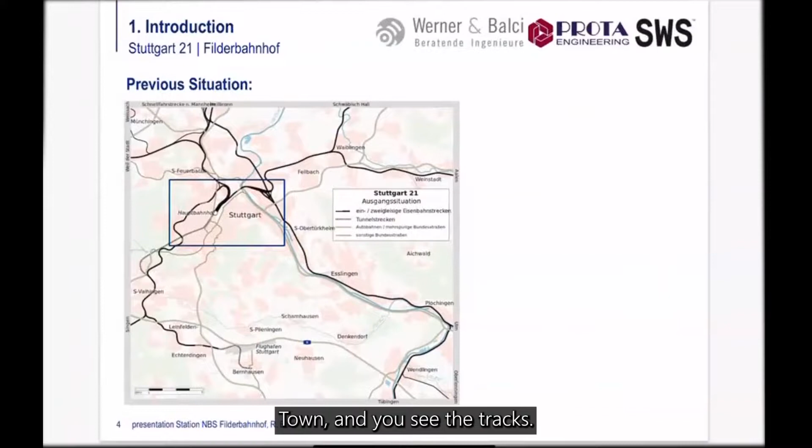This is the track going east. With this track you can go to, maybe, Ukraine, the war zone. Now we have a war in Europe. Here we have a track going to the northeast, let me say Berlin. Here is a track or line going to the north, I will write down London. On this left side you can go to the west, I will write Paris. And down south you can go to Switzerland, I will write Zurich, or Italy, so I will write Italy.

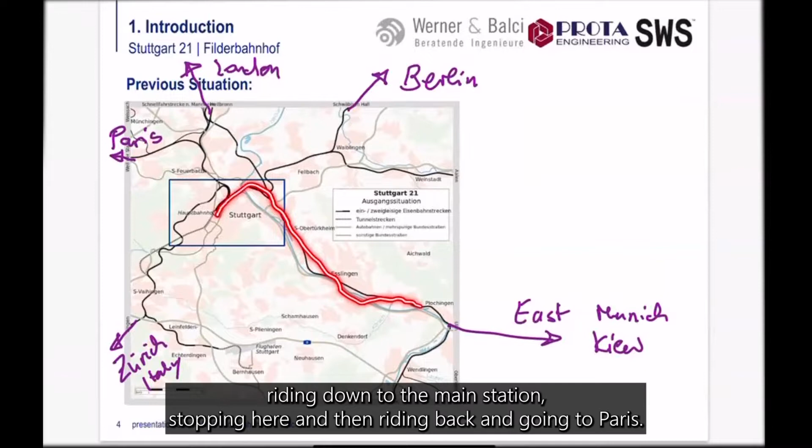So as you see, Stuttgart is, for railway issues, a hub, a center. And the problem is the Stuttgart main station is very old and very weak. Every train coming from, for example, this line, rides down to the main station, stops here, and then rides back and goes to Paris.

So this is the next thing I want to show. Every train comes through this line to the platforms, stays here, waits, and then goes back to the other place. This is a so-called dead-end rail hub. We have 16 platforms. The problem is that we have only five tracks at this point, so some trains are waiting here so that the tracks are free to leave the Stuttgart area. This is a big issue, and you can't widen it because there's no land to make extra tracks.

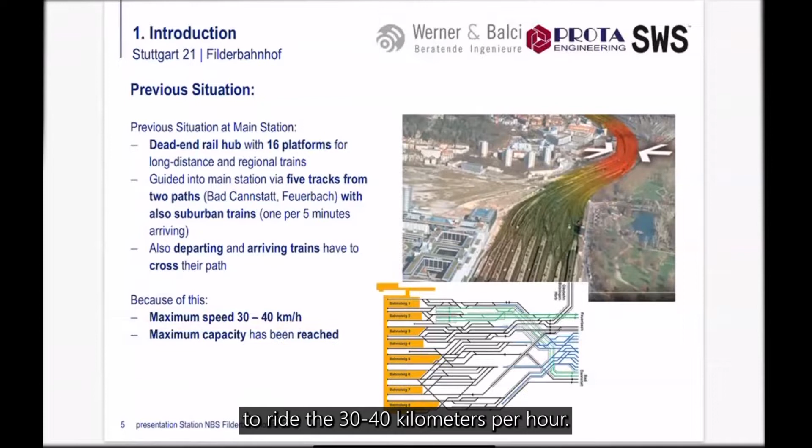Another thing is we have housing and buildings around the train station everywhere along the tracks. Because of sound problems, trains are only allowed to ride at 30 or 40 kilometers per hour, so it's also a speed issue. The capacity is reached, so there are trains waiting, and we have a lot of delays and problems. You also see a lot of crossings here, and these are special railway points which need to be repaired in a certain time. This is also a big problem of Stuttgart.

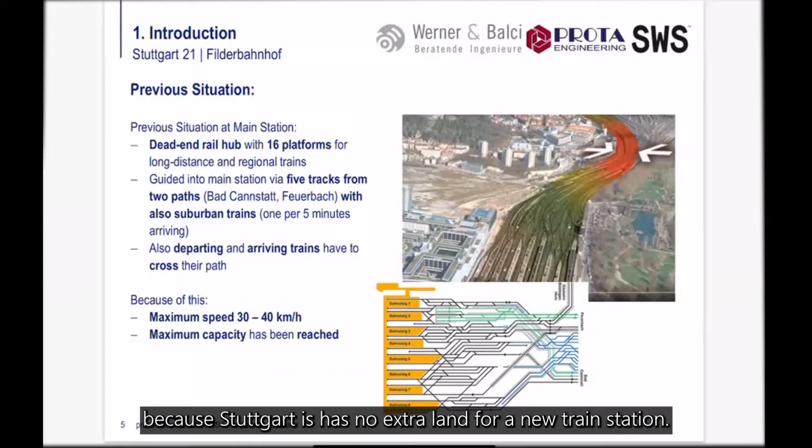As I showed, we are in the center of Europe, but we have the weakest train stations, so it was decided to change it, to build a new train station and new tracks to make it more efficient. It's a problem because Stuttgart has no extra land for a new train station, so the only thing to do is put this train station into the ground. This will be the new solution: trains coming from here will go to the main station and pass without riding back through the train station. We will later focus on this train station.

This is the new airport train station where our office is mainly designing. You also see numbers here: 1.1, 1.6, 1.3, 1.4, and so on. Our company is working on 1.1, 1.6, and 1.3. Today I will talk a lot about 1.3.

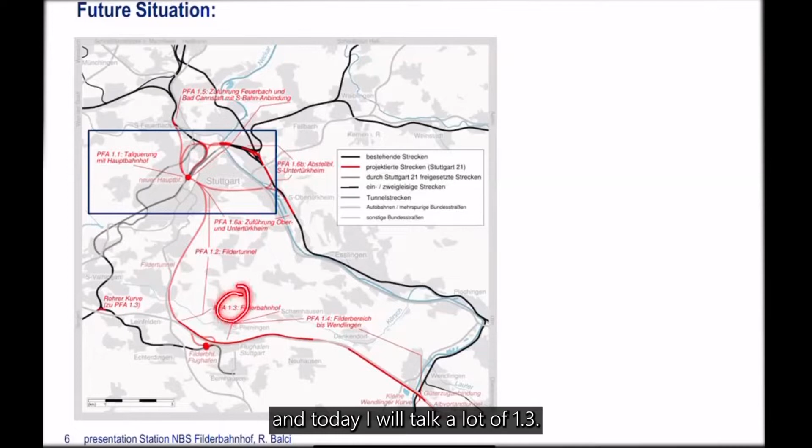Black are the existing tracks. Gray tracks will be removed, so we will not have these gray tracks anymore. So what does it mean? It means we need to build 120 kilometers of new tracks, 4 new stations, 33 kilometers of tunnels, and 18 bridges. The biggest gain is we will have free land because the tracks will move down under the ground, so we will have 100 hectares of land for city development. This is 1 million square meters of land downtown in Stuttgart, in the heart of Stuttgart.

The next improvement is we can ride with 250 kilometer speed, so it's also very efficient. We will increase the capacity, and the solution is that approximately 18 million trips will move from car to railway. So people will ride more by train than by car, and it's also good for the environment.

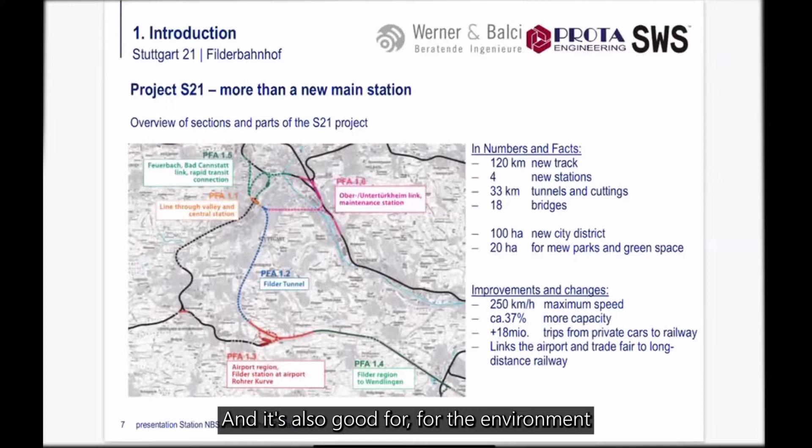Here again, this is the airport station. This is the main station. We will talk about the main station a little bit and then later focus on the airport station.

So just to understand what is going on in Stuttgart, this is only an overview, not in detail. I showed you the numbers: we have 1.4, 1.3, 1.2, and so on. Our company is working on 1.6. On 1.1, this is the train station here in Stuttgart. 1.3 is the airport, this is the airport station. This is the main station, and these two projects will be my part here in this seminar.

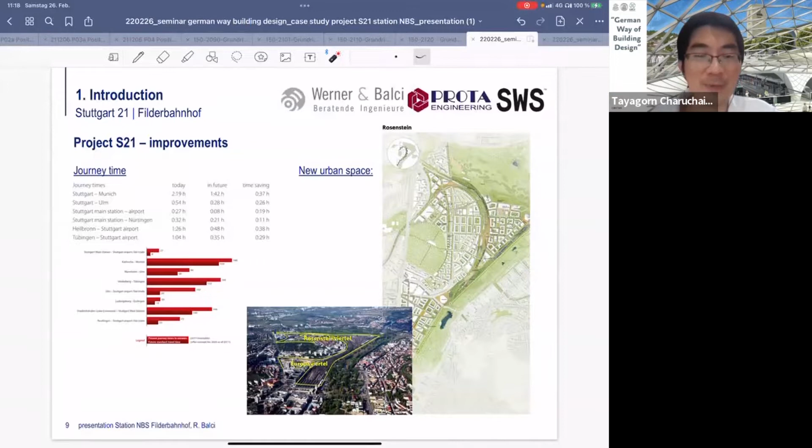Okay, so I talked about extra land. This is a photo. Here are the existing platforms of the existing train station. So after we put all these tracks under the ground, we will have 1 million square meters of land in Stuttgart downtown for free, and this is very, very good for the city development.

So here you can see what will happen in maybe 20 years if this land is developed. We will have green areas, office buildings, apartments, and so on. It's a big gain for the city of Stuttgart.

Another thing is, I told you about speed and efficiency. For example, if you want to ride from Stuttgart to Ulm, you need 54 minutes today, but this is only if you have no delay. I told you we have delays because the tracks are busy and some points are not working, so this is the minimum time today. In the future, we will have only 28 minutes with the new train station.

So it's very efficient. For example, from Tübingen to Stuttgart Airport, you need 1 hour 4 minutes today; later you will ride in 35 minutes. So it's also a big gain for people riding by train. For example, Stuttgart to Munich, now you need 2 hours 20 minutes, and later it will only be 1 hour 40 minutes. So the train station will be more efficient.

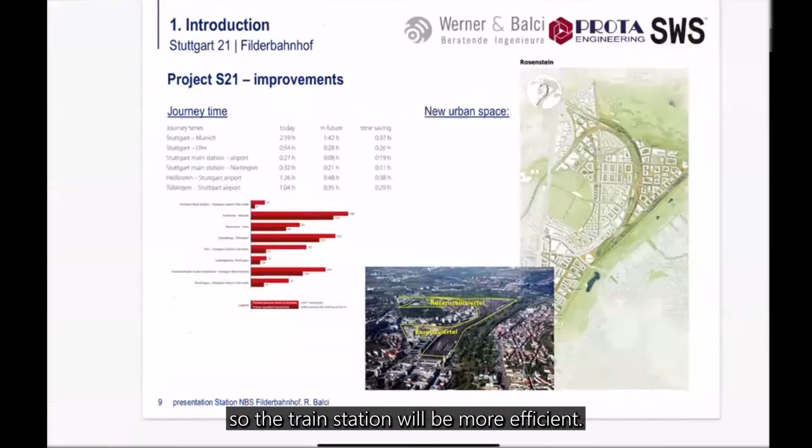I'm riding by train many times. I use the existing train station, and I need to arrive 20 minutes earlier because some trains start earlier and some trains have delays, so I have time to adjust. I also calculate half an hour of tolerance for arrival, because I know Stuttgart main station is a big problem.

Stuttgart main station is a big problem. Other train stations in Germany do not have that kind of problems.

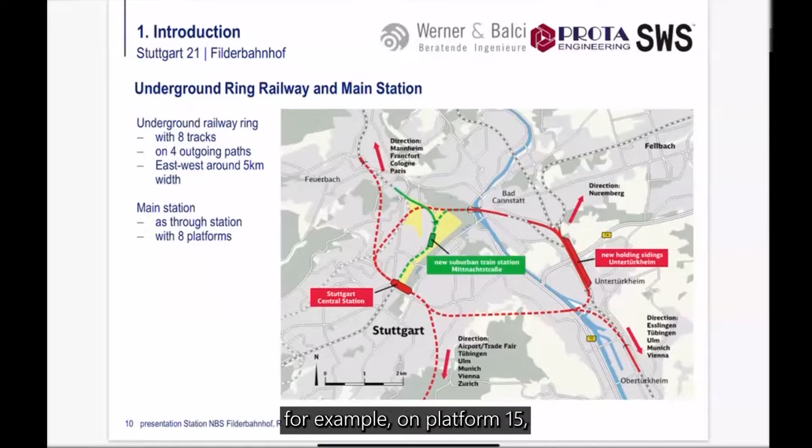The new train station will only have 8 platforms. The old train station has 16 platforms. So it's more efficient because you don't have this waiting time of the trains. If I arrive in Stuttgart on platform 15, I need to run with my luggage to platform 1. Later on, with only 8 platforms, it's also easier for people to go from one platform to the next.

So here in this photo you see the old tracks, the old station. Later, the new station will be underground, and crossed by 90 degrees, totally changing the track direction. This land will later become a new district of Stuttgart.

Here's a visualization. This is the old train station building, built 100 years ago. It's a historic building, so it's not allowed to be demolished. But later on, this is what we will see of the train station.

The entire train station will be underground, and you can walk by feet directly over without any stairs. So for a handicapped person, it's a direct connection without any stairs.

Platform length 420 meters, 8 platforms, as I told. These photos are not the latest photos, but you can see the concrete work is already finished.

These 'light eyes,' as we see here and here, will have a very positive effect. You will have a lot of daylight in the train station. You will not feel like you're in a tunnel. It's like a roof. They are here, these spots - these are the light eyes.

Our company designed these cup-shaped columns. We were in charge of the formwork for this shape. Here you see a sample of how they cast it. It's concrete - not plastic, plaster, or metal sheet. It's cast in concrete, and it's also white concrete.

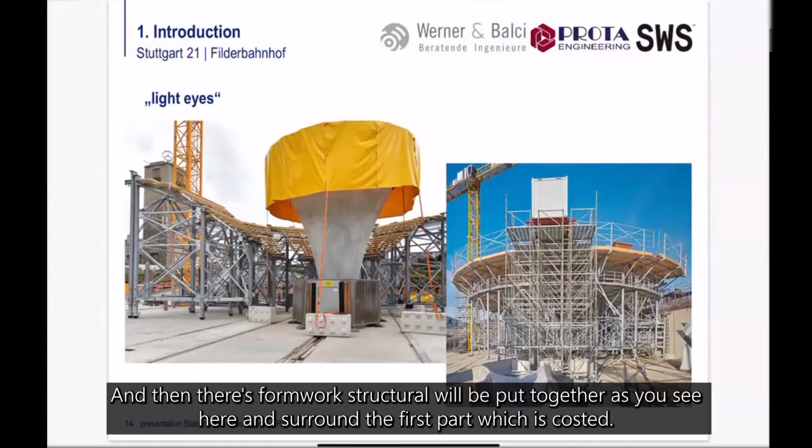This is the first part cast, and then this formwork structure will be put together, as you see here, and surround the first part which is cast. Later on, this is a top view after the reinforcement work. Here's the light eye, where there will be a glass covering. Then after casting, one column is finished.

To understand the height, you see here a car - this is a car. So it's really a very high column. We are talking about 1,500 tons of concrete. Our company did the design of this shape.

It will be very beautiful, and in my point of view, it's a very big gain for the city and for people traveling to Stuttgart, because if you ride by train in Europe you will see almost standard train stations, and it's really boring. But if you arrive in Stuttgart, you will see something special. It's totally new.

Okay, now we will switch over to the airport train station. Pop, do you want to translate this light eye cup-shaped columns part, or shall I go on?

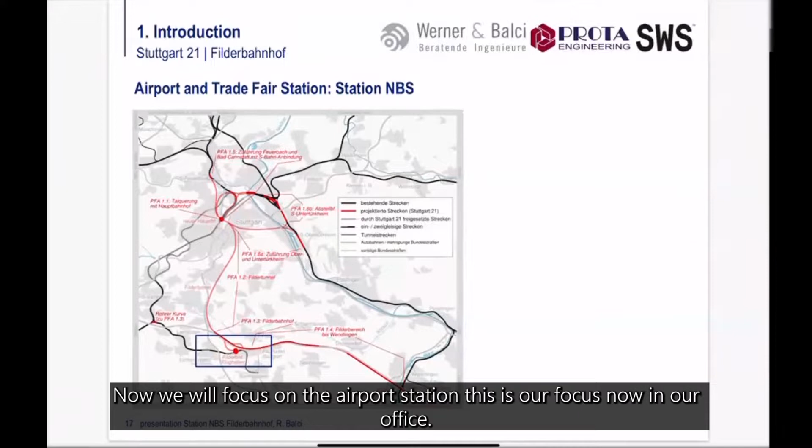This was the train station. Now we will focus on the airport station - this is our current focus in our office, we are working on the airport station. The airport station, from an architectural view, is a very simple station. It's not that nice, we don't have the nice columns like in the main station, but it's the deepest train station in Germany.

Just to understand the location, I will zoom in a little bit. This is the main motorway number 8, the main motorway from east to west, passing through Stuttgart. Here's the airport of Stuttgart. We have the metro line called S-Bahn going this way.

We will have the Gäubahn, the blue line train coming from Switzerland and Italy. We will have the tunnel coming from Stuttgart center. So here we will have a hub for motorway, for cars, for aircraft, for metro, for high-speed trains - it's a hub of traffic. These buildings here you can see are the new exhibition center of Stuttgart.

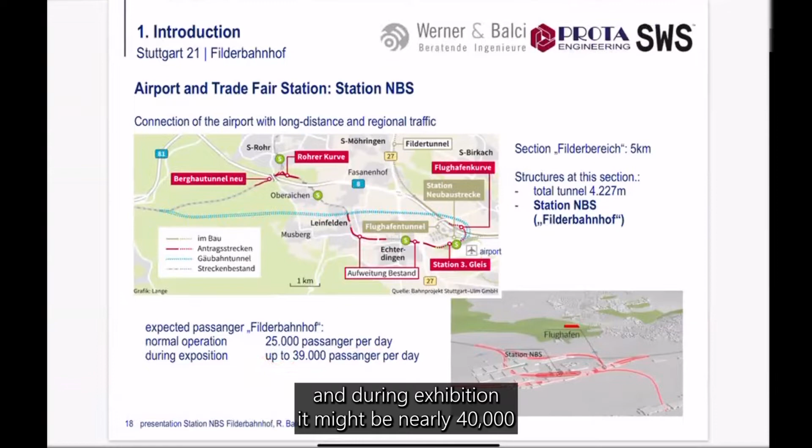We will have 25,000 passengers per day, and during exhibition it might be nearly 40,000. Here you see the new train station, and the tunnels are crossing the exhibition center. The tunnels go directly under the existing airport buildings. We are crossing the motorway here, here, here, and here. So this was the reason why the tunnels are so deep in the soil.

But it has to be also very close to the surface, because the people need to use this train station. Therefore, it was set at a depth of approximately 30 to 40 meters. But it's the deepest train station in Germany now.

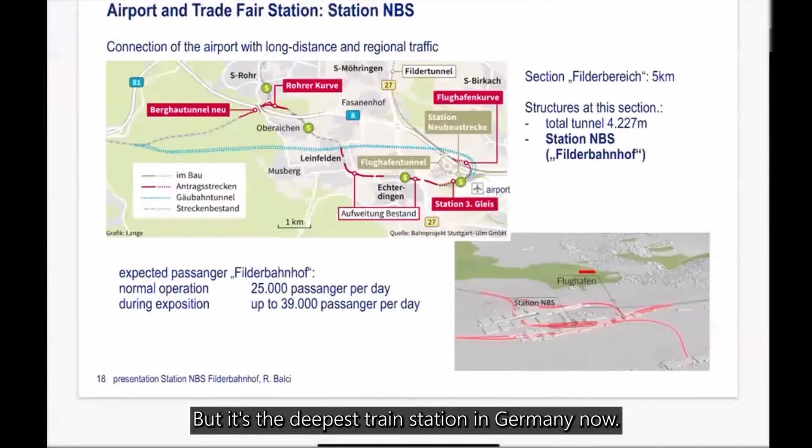Here you can see a view from top to understand the train station and the tunnels. This is the train station, from here to here. You see the tunnels under the exhibition halls, you see the tunnels under the airport buildings, and you see the crossing of motorways, a lot of crossing of motorways. So it's a complex project, but it's a very important project for all the people.

For example, if you want to go to the... one moment.

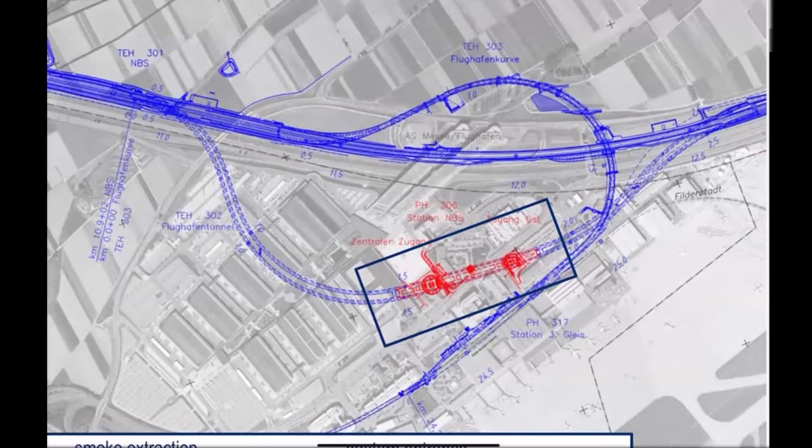If you want to go to the exhibition hall, you come by car and you can park here in this parking building and go to the exhibition hall. You can also park here and take the train to go down to downtown Stuttgart. Because it's hard to find a parking lot in Stuttgart, you can park here and ride downtown. Or if you arrive by plane, you take the train station and then you can ride to where you want to go. The train station...

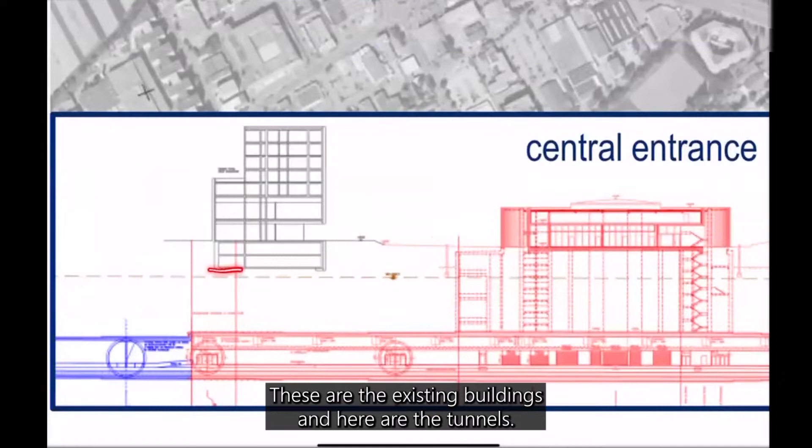Here is a good photo, a view. These are the existing buildings and here are the tunnels, so we have a little bit of soil between. It was the reason moving it upward would be risky for the existing buildings. Moving it downwards would be better for the existing buildings, but then all the people would need to go down further to the train station platform. So this is the optimum height under the soil, under the surface.

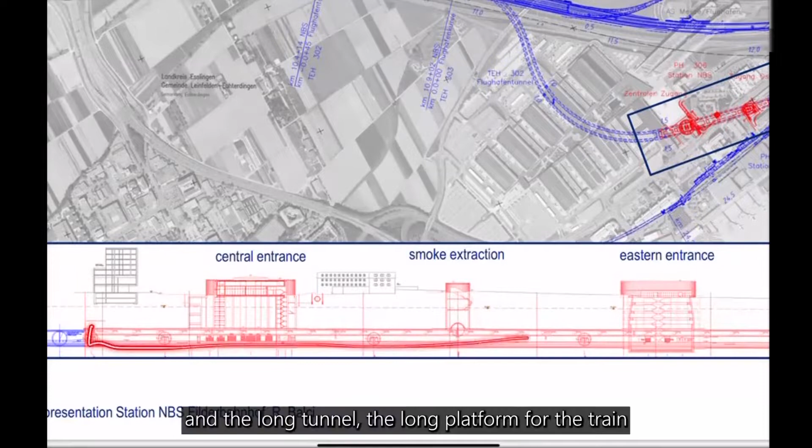So the train station consists of the central entrance, the big entrance, a smoke extraction building, and the eastern entrance. We have 3 buildings going to the surface, and we have the long tunnel, the long platform for the trains.

Because it's very deep, the most important thing of this station is smoke extraction. In case of a burning train, the people waiting on the platform need to find a way to go out of the train station, for example that way. And smoke is a big issue because it's very deep.

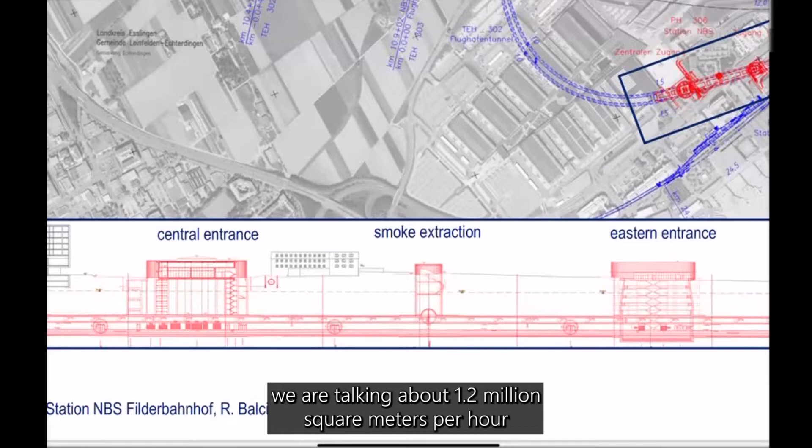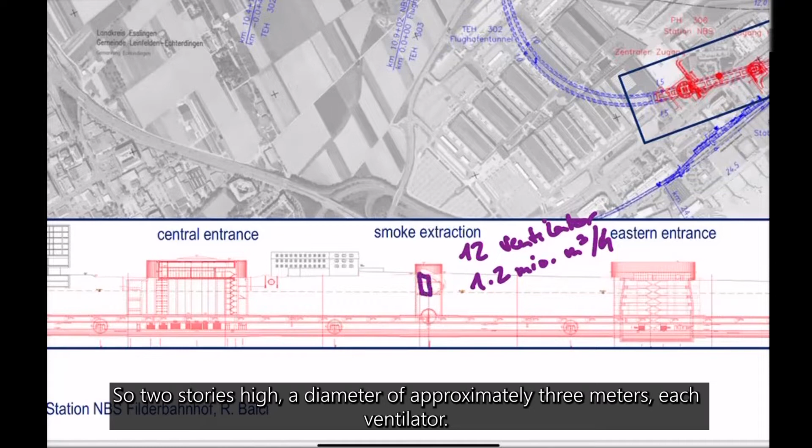We need ventilators, big ventilators. We are talking about 1.2 million cubic meters per hour extraction power, with big ventilators here, here, here, and also here. In total we have 12 ventilators for 1.2 million cubic meters per hour air extraction. These ventilators are that big, 2 stories high, with a diameter of approximately 3 meters each. Therefore we also need a lot of electric power. There are 3 transformers installed here only for these ventilators.

So in case of fire, let me draw it here. In case of fire and in case of smoke, the smoke will be extracted out of the platform, for example that way. And the people here can breathe and walk to the elevators and staircases.

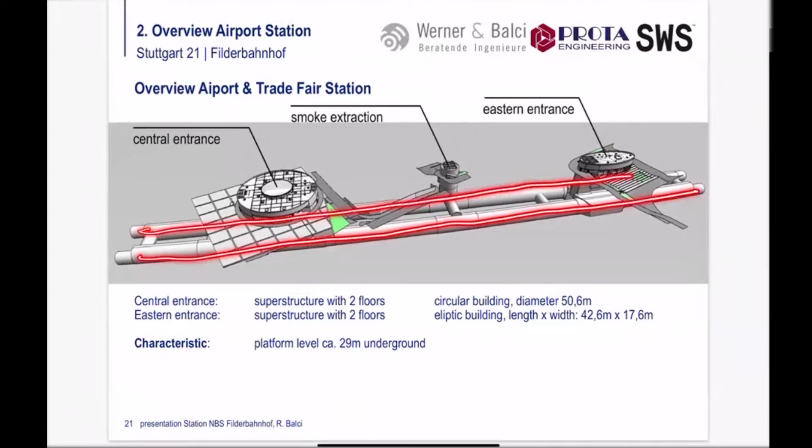Okay, this will be the new central entrance of the airport train station. So as I told, we have these platforms, the tunnels, and we have 3 buildings: central entrance, smoke building, and eastern entrance.

We are 29 meters under the soil from here, measured down to the platform. Here we are a little bit higher, close to 30 meters.

So the structure of the central building is mainly a concrete structure. We have micropiles, footings, a post-tension slab, and a steel structure here in the middle. Very important and something special is this membrane. There's a membrane roof, and this membrane roof is a cushion. It's like a balloon, you blow it up with air pressure, and it's stable because of the air pressure. We will talk later about this.

Okay, so this green building, as you see, is a concrete building, and it will be built later after the underground work is finished.

This is the steel structure. It's a wide span steel structure without columns.

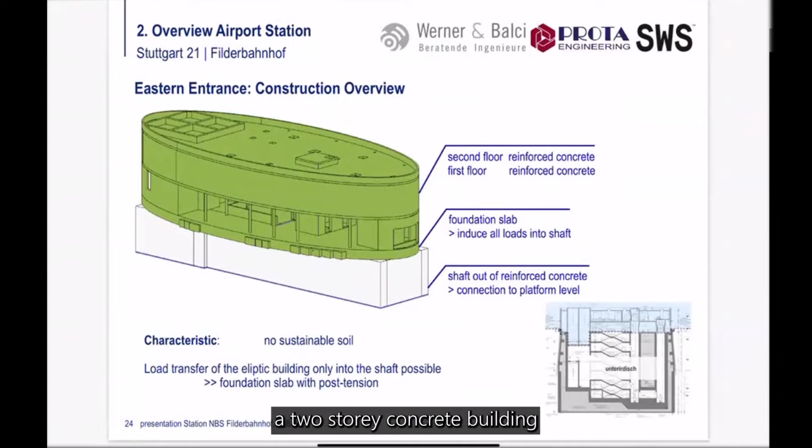Here we have the eastern entrance building, and it's an elliptical building, a two-story concrete building, and it was not allowed to build foundation here, for example. Therefore, we used post-tension slab.

Just to draw, to show you, we have the shafts going to the ground, and we have the elliptical building here. And the forces coming from left and right, we need to bring them to the center, and therefore we have a very strong, we are talking about 1 meter post-tension slab.

And these are the post-tensioning areas. You see this zigzag concrete shape there.

The situation on site is that the underground works are going on. We are not finished almost, but it will take, let me say, 6 months, and then we can start with the buildings. So here we have the underground work is going. The platform will be, the tunnel is walking that way, it's passing that way.

And you see the huge crane here. This is a huge crane to bring the machines up and down. This is a photo from the 24th of January.

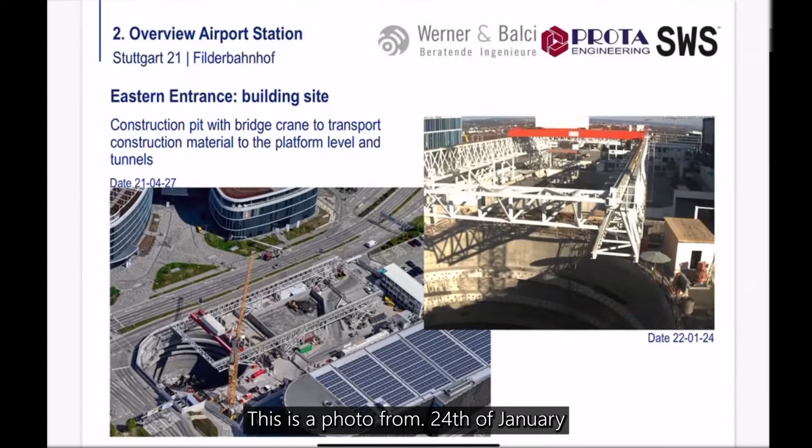So let's talk about the roof structure of the entrance building. As I said, we have a membrane roof. Do you have membrane roofs in Thailand? Yeah, just a small one, a cushion which is blown up with pressure air. Not just a temporary structure, the permanent one.

Okay, so we have a span of 20 meters, and this is the cushion. This is the shape. And there's a big pump here, and we are pumping air into this cushion.

So there will be always air pressure between these membranes, and it's a structural system. So the biggest problem of this roof is if we have a problem with the pumps, if we have a leakage, and we have a loss of pressure and a lot of snow.

I know you don't have any snow in Thailand, but if we have a lot of snow load here or water, the system will collapse and hang. And if we have later on or at the same time a lot of rain, then we will have a water sack.

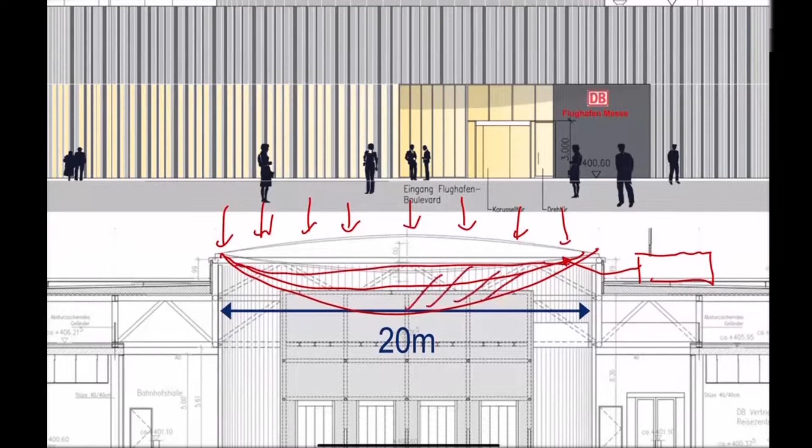And we calculated this load case, and we had 250 tons of water in this membrane. And you have to imagine, one moment, I will show you.

So you have to imagine you are the guy coming from Bangkok and waiting here. And here you have 250 tons of water hanging on the membrane. And if this will collapse and fall down, 250 tons of water from a height of approximately 40 meters, I don't want to imagine what this water will do with you down at the platform.

So therefore, we were asked to change this system. For architectural reasons, it would be very nice to have only one membrane, but for safety reasons, it was not allowed to build it that way. Therefore, we searched for a solution how to support the membrane.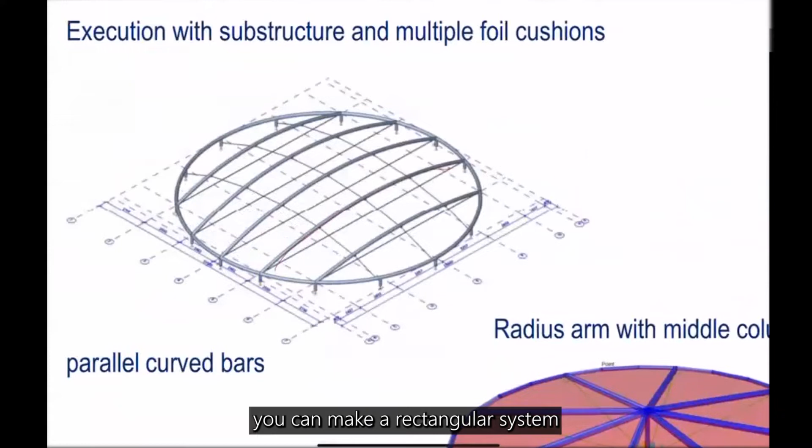There are different systems. You can make a rectangular system like that, or to support the membrane you can use radial arms, or you use something like a tensegrity system. We calculated everything and also the cost efficiency, and at the end, the client, German Railway, decided to do the tensegrity system.

And there's a sample just for your understanding how it would look like. This is the system, but we will not have so many bars like here, we will have less. And we will have also a membrane here in the middle, so it will be very transparent. The aim is to have as much daylight as possible on the platform.

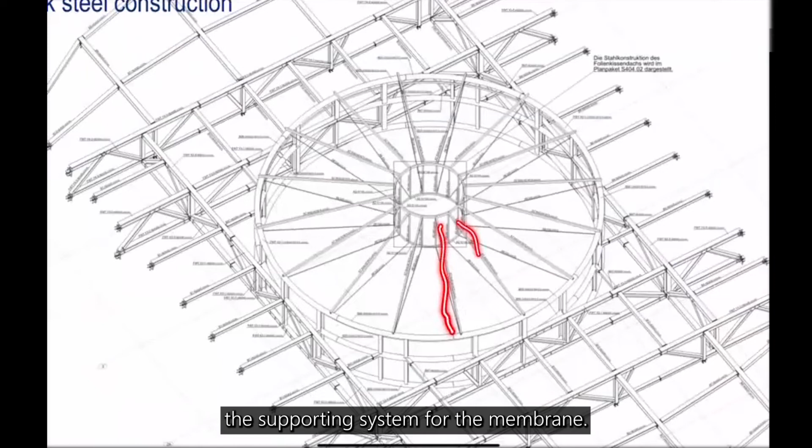Okay, the steel structure, and now you can see the supporting system for the membrane. So the membrane, even if there is a loss of pressure, it will not collapse and have a water sack.

Let's talk about the foundation. It was also not that easy because we have a tunnel 30 meters deep. We have a tunnel project, and if we build with big piles, we would damage the tunnels. So we were only allowed to use so-called micro piles.

Do you have micro piles in Thailand? Do you know this system? Yeah, micro pile. Okay, it's a steel pile, a very small steel pile, and the capacity is not that big. Therefore, we had thousands of these piles here. You can see everywhere the small piles.

This was the solution to bring the load into the soil. We have the post-tensioning slab. In this area it's post-tensioned, and in this area we have no tendons - it's standard reinforced concrete.

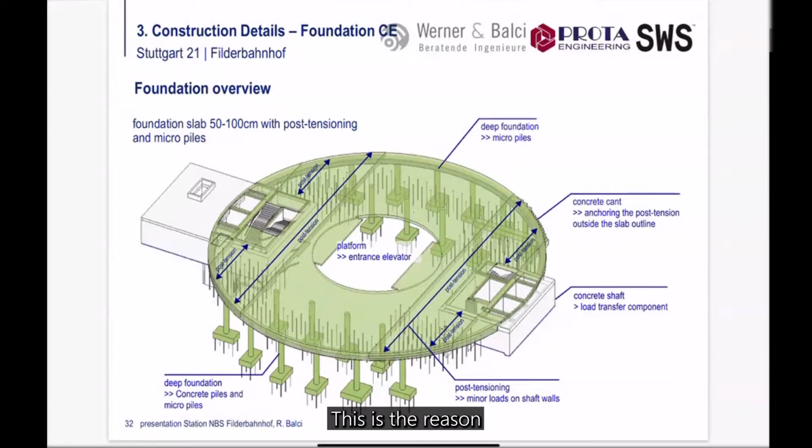Okay, these are the micropiles. So if you know what this is, we are talking about a bar of 40 millimeters, and this is something like that.

And we also had post-tension slab. I know you use this system also in buildings, but here we used very strong tendons. We are talking about tension force of 4,000 kilonewtons, or 400 tons of tension force. I think you should know how to install these tendons and how to make the tensioning and so on.

The Eastern building, we had a problem - there was no chance to build any foundation. So we have no foundation, and we are talking about a span of, let me say, 7 meters. We made this with a 1 meter thick base slab and post-tensioning in this area. So we have post-tensioning here, post-tensioning here, and reinforced concrete.

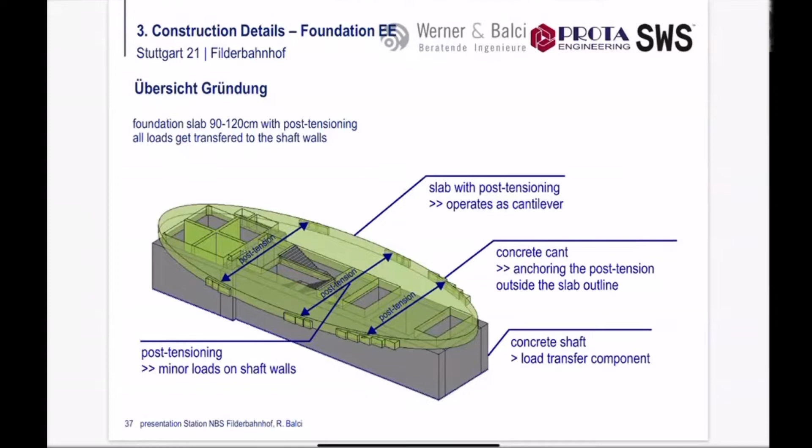And the shape of the tendons is that way. The force is not that high - we have 2,400 tensioning force.

And now the biggest problem of this project is the acoustics. As I told you, our office is an acoustic expert. We are listed in the top 10 of acoustics in Germany.

We tested the evacuation situation, where I told you about these ventilators - we have huge ventilators with 1.2 million cubic meter per hour capacity. The problem is that in case of fire, if we run these ventilators, it will be very, very loud. So if, for example, a burning train arrives at this train station, the fire alarm system will run, the ventilators will start, and it will be very loud.

The speech alarm system, for example, if you are a guest of this train station, is telling you please leave the train station, please use the next staircase to leave the train station. But the speech alarm system is not possible to be understandable.

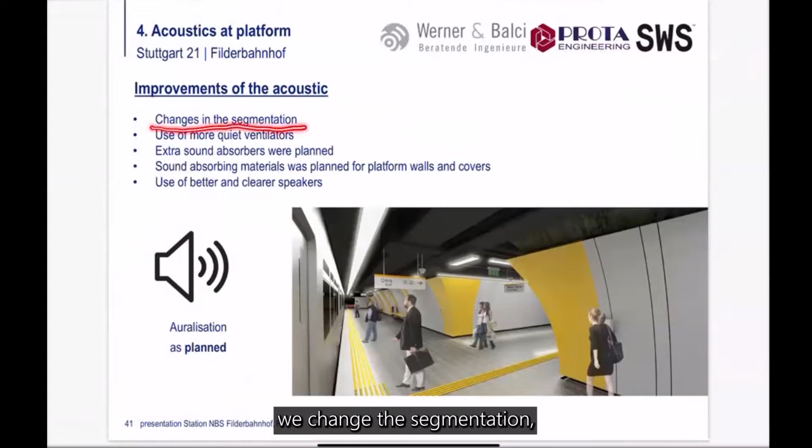So what is the solution? We changed the segmentation, we changed the exhaust, the smoke extraction system. We use more efficient and quieter ventilators. We installed a lot of sound absorbers.

To understand, we used these panels with sound insulation and sound absorption. We used the roof, acoustic elements to optimize the situation, sound absorbing systems, and better speakers. At the end, it was enough to have a sound quality that the speech alarm system will work.

For example, for reinforced recycling concrete - we call this recycling concrete - for road works and other things. Also we have a green party government here, so environmental issues are very important. For example, if there are special birds living close to this area, the construction company needs to build special camps or trees for these animals so as not to disturb their area.

Yeah, this is a big problem. Also, we have an ongoing airport project working, an ongoing motorway working, and an ongoing exhibition hall working. This airport project is also very difficult, as we have these difficulties at the Stuttgart main airport and main train station.

And how about the people in that area? Are they okay with construction this big, lasting 6 years?

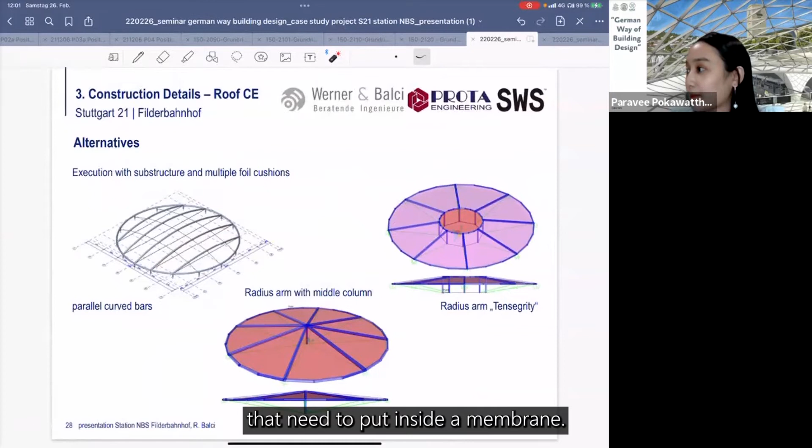And after adding structures, do you structure the membrane? Is it changing a lot about the amount of pressure that needs to be put inside the membrane? We are talking about 500 Pascal pressure.

The pressure is the same. The problem is we can't increase the pressure because you will have too much tension in the membrane. It's like a balloon - you can blow it up and then it's exploding. You are not allowed to have too much pressure, so in this project we use 300 to 500 Pascal. It's not safe to have more pressure.

If we have a lot of snow, the snow will push the membrane downwards, and the pumps bringing the pressure cannot avoid that the membrane will have a deflection. Then combined with rainwater, we will have a water sac, and there's no chance to fix it with pressure. There's no pump to push the water and snow away from the roof. It's not possible.

But in countries like Thailand, where we don't have this snow problem, this membrane roof would not be a big problem, because rain will fall down and drop to the side because of the inclination of the membrane. So we will not have a water sac problem. A drop of water can move downwards, but snow will lay down on the membrane and then it will be flat.

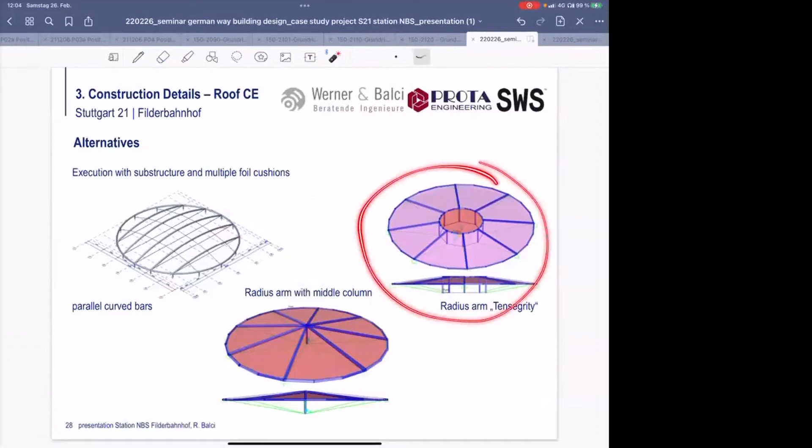Okay, thank you very much. I want to show you just a small video about our project in Stuttgart.

These are the new tunnels. Here you see the construction site of the main station. Everything is done with an ongoing infrastructure - there are trains crossing, people crossing, or cars crossing the construction site.

This is a very nice bridge. It's a steel structure, like a suspension bridge, but it's done with steel plates, not with tension rods or tension tendons.

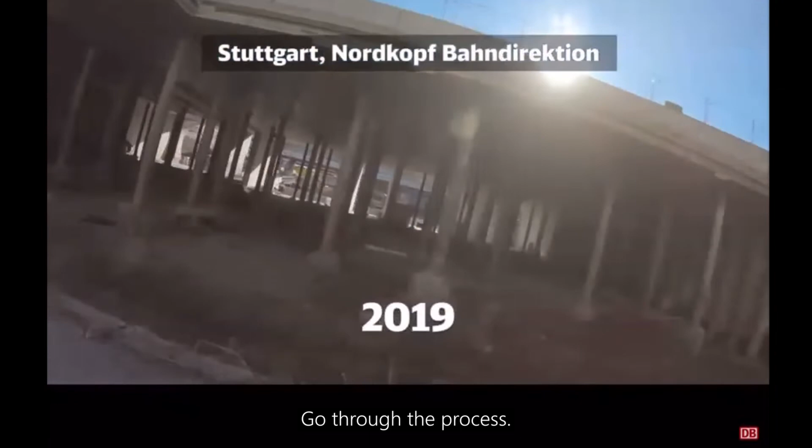The main station. These are the 8 platforms I talked about. This is the existing historic building on piles. Between these piles there is an old historic building, and our train station is crossing this old historic building.

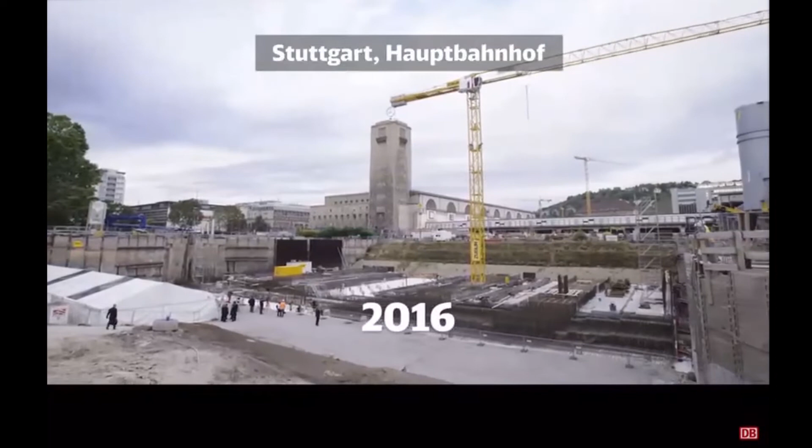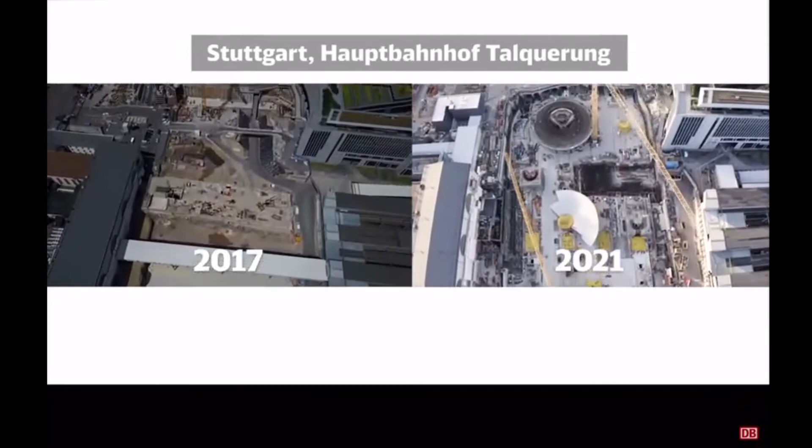This is the south of our train station, Stuttgart. Now we are moving with the tunnel to the airport, to the latest project I showed you, the airport station. Crossing the motorway - I told you this is the most important motorway in Stuttgart.

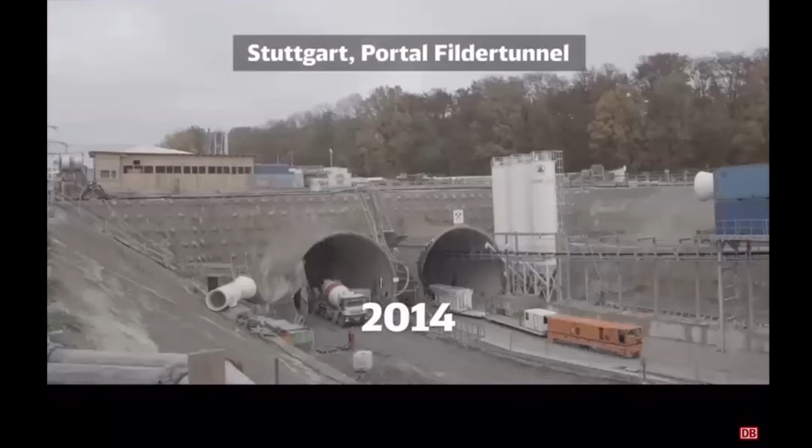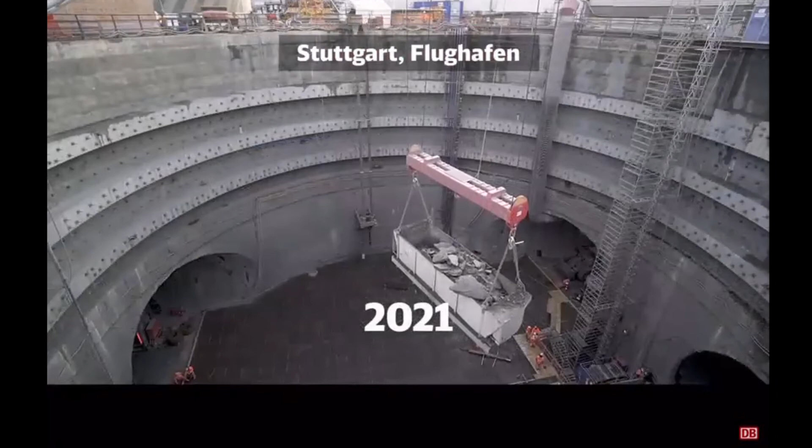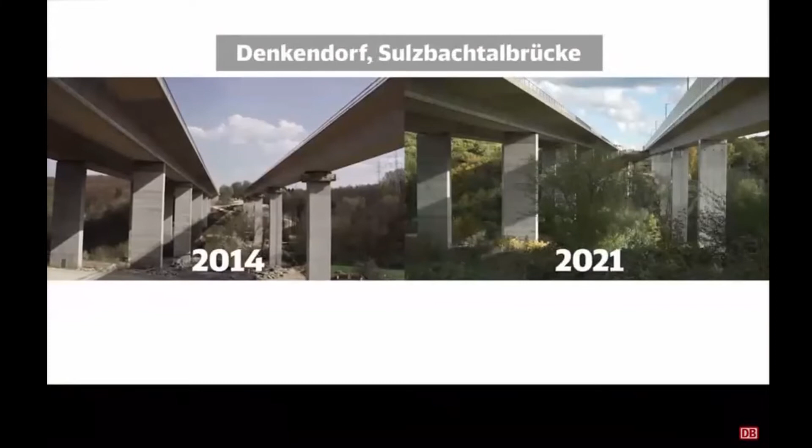The big machine you see is 100 meters long to the end. Here you see the big crane - I explained to you the big crane for the tunnel work. This tunnel crosses the motorway; it will go down under the motorway. This is a small bridge, not that important.

So I think this is enough to understand our project. Okay, that's the first project. Are there any questions?

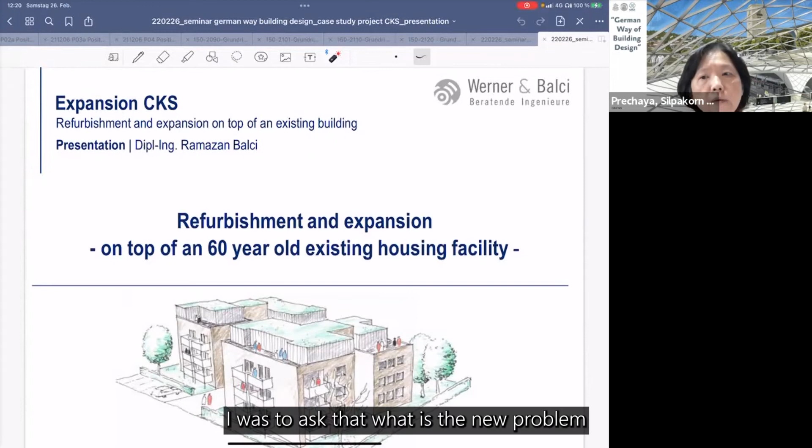I would like to ask - is there any problem about the noise coming from the rooftop?

One moment. Are we talking about this roof here? Yes, but this is glass, and I understand the trains here are at the platforms.

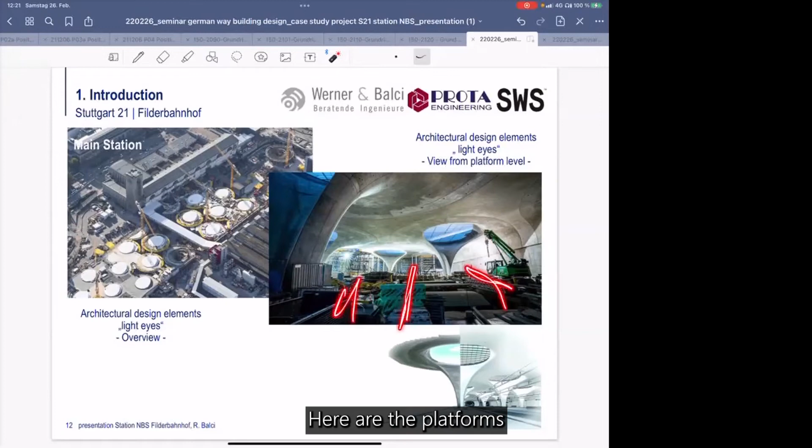They are not driving at 250 kilometers of speed, they are staying here. The trains are not that fast in this tunnel, so the trains at the 8 platforms here will not cause a lot of sound.

The highest sound we have is in case of fire. When these huge ventilators are working and making the smoke extraction, this is the loudest part, but this is an emergency case. That means, let's say, every 30 years when we have a fire in the train station, it will be very loud, but okay, it's an emergency situation.

But the sound caused by trains is not that loud, because in this station the trains are not that fast. Is this understandable?

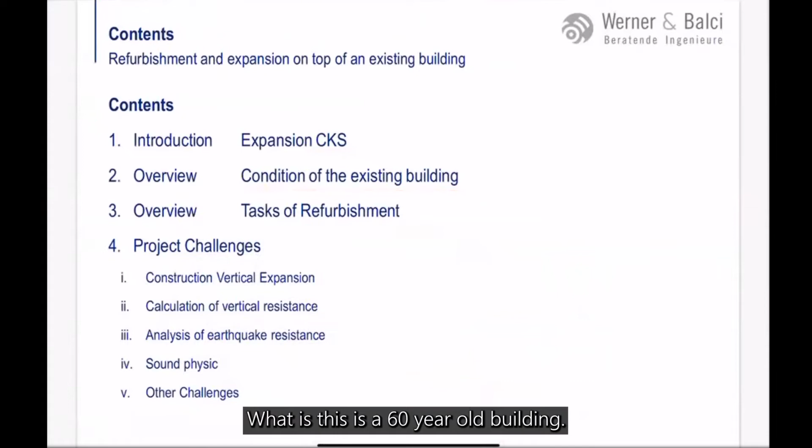So we will talk about the condition of the existing building, a 60-year-old building. What is the situation, what are our tasks to refurbish, the challenges of the project. We have the vertical expansion challenge, the vertical resistance, the earthquake resistance, and also sound physics and other challenges.

So CKS, you see here an overview. This was the existing building, and we added an extension on the roof.

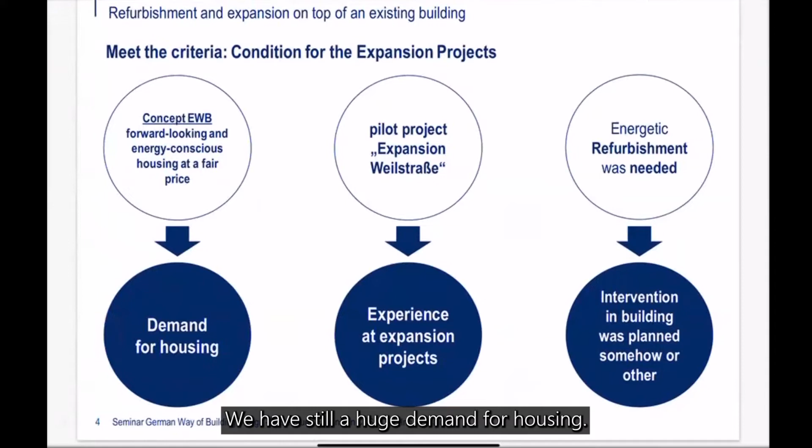We had a huge demand for housing, and we still have a huge demand for housing. We need every square meter, so we need to produce new areas for apartments, but there is no land. No free land, and no green land will be developed and changed to building land. So therefore we need to use existing building land and concentrate and use it more efficiently.

And it's also very important, at the end it needs to have a fair price, because luxury apartments are not that hard to build. You can build very expensive with expensive materials and expensive architecture and so on, but our problem is to have, also for the people, for the low-income people, a fair price for rental.

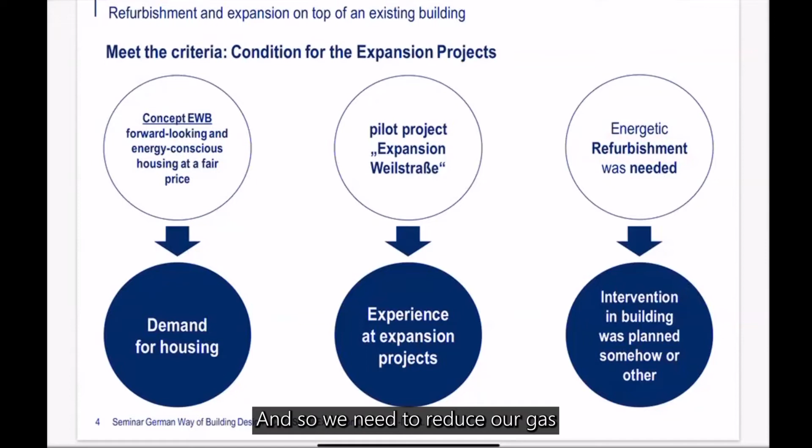Our company has experience in how to make expansions and extensions on existing structures, and also how we can refurbish the existing building. We make energetic refurbishment. We have a war in Europe between Ukraine and Russia, gas prices are increasing, and 55% of Germany's gas is coming from Russia, so we need to reduce our gas and energy consumption, not only for the war reason but also for ecological reason. We need to reduce it.

We checked if there was a chance to increase the height of the building. It was possible. We also checked the structure, if there's a structural feasibility to do it, and the main problem was the consolidation of soil of the underground, and also it had to be done during a lived-in situation.

So the existing apartments needed to keep working functionally, because the people, the tenants, would live there without leaving the house during construction. This was very important, because there was an agreement with the inhabitants living there: we will make a construction, but we will not disturb your life.

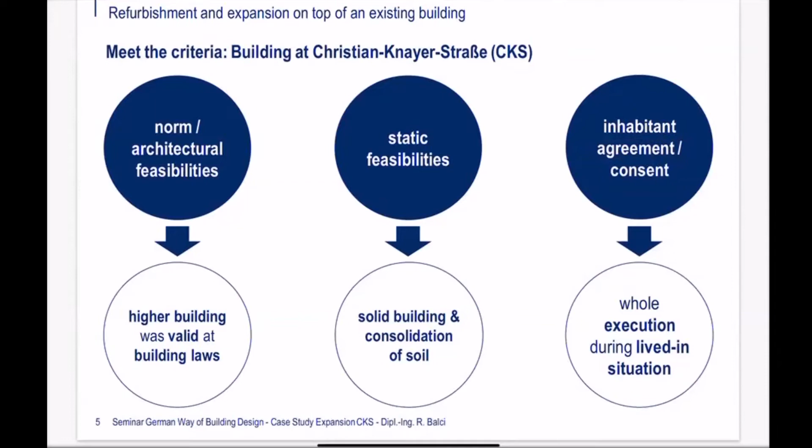So here you see this building again, the existing structure. This was the situation before. These buildings were built in the 60s in Germany, so an almost 60-year-old building. It's a very, very simple structure, we have brick walls, concrete slab, brick walls.

The energy consumption was terrible, so we decided to look in detail at these buildings. Here you see also standard windows, we have a lighting system.

Here you see the entrance. This roof was terrible. We have stairs, so for older people or handicapped persons, it was not possible to live there, or very hard.

You see, this is the main entrance to the house, and we have here a window, so the people entering the house can look into the room of some apartments. So it was not nice, but these buildings were built in the 60s.

And in the 60s, there was also a high demand for apartments because of the end of the Second World War. A lot of Germans came from old German areas to Germany, and therefore there was a huge demand.

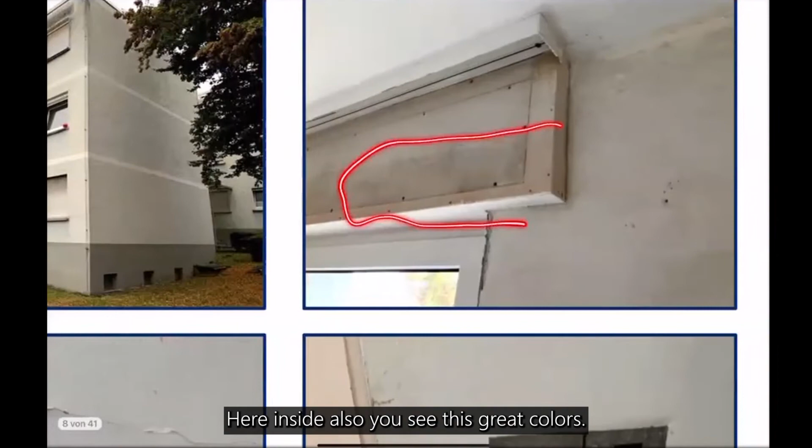You also see here something like these colors. This is a moisture and humidity problem. Here inside also you see this gray color, it's also a humidity problem. Then we have water infiltration. We have also a very bad situation for mailboxes.

So therefore, we decided to refurbish the existing building also. Okay, do you have any question about the existing?

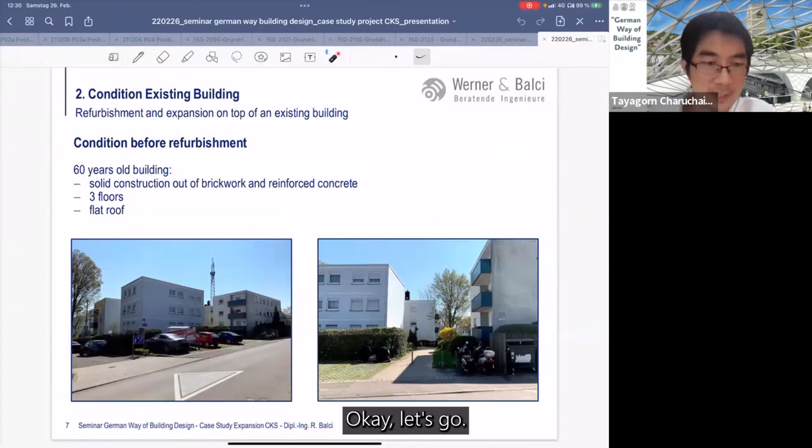It was not allowed to build the entire area. We were only allowed to use 75% from the authority, and therefore we used this area for terrace and balcony.

At the same time, we said, okay, we had a problem for handicapped and old people living in these houses. We decided to build a new staircase, and a new elevator shaft.

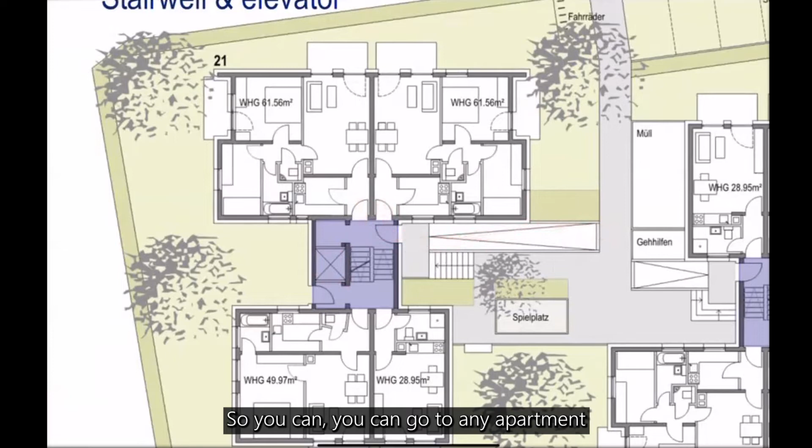So we will have a ramp for people who cannot walk on stairs. We will have ramps to enter the building, so you can go to any apartment without using a stair, and then you can use the elevator, and from the elevator you can go also to the apartment. Okay, for the younger people we kept the stairs, if they want to walk over the stairs, there's that situation.

And now I told you that we did this construction with the house needing to keep working. So if we have a construction site here, the people cannot get into their apartments anymore. Therefore, we built...

temporary staircases outside, and the people entered the apartments from outside during the construction. So this was also a big challenge. And the existing tenants accepted this because later, after this project, they will have big benefits.

Okay, for energetic consumption, we use cladding, new windows, highly insulated roof and highly insulated basement slabs. We have at least 5 months with heat demand, not comparable with Thailand, but we have a big heating demand here in Europe, and therefore it's important to focus on heat energy.

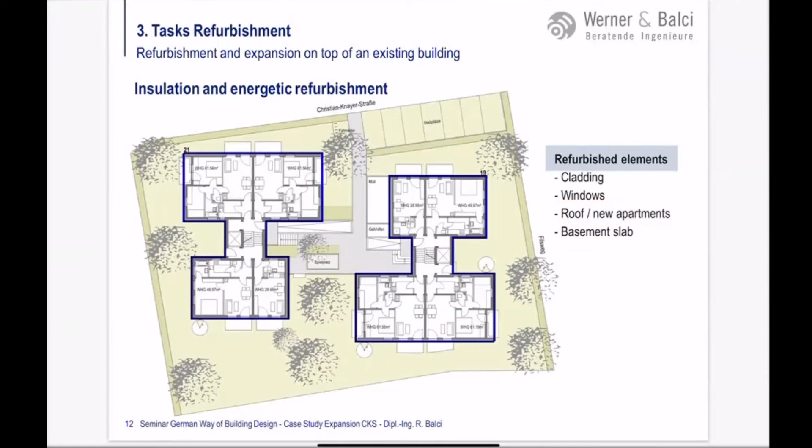Okay, and to give the people living in the existing apartments also a big benefit, we added new balconies. So here we added balconies, so every existing apartment got a balcony. They didn't have any balcony till now, but after this project, they will have balconies.

This is important, it's important to convince the people living there. They are tenants, they are not the owner of the building, but they have a lot of rights. And if they go to a judge or court, they will mostly win because the rights here for tenants are very high.

For fire reasons, we checked the fire escape situation and detected that this was very weak. Therefore, we added 3 new fire escape staircases to have fire safety later on.

Okay, the vertical expansion, as I told, we have the existing roof slab here. And how can we extend in the vertical direction? So this is the solution, how we did it.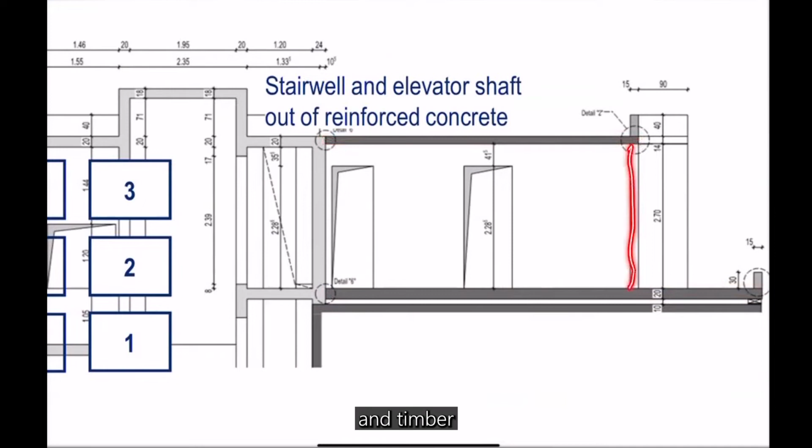The only concrete thing we used was the staircase. The staircase extension was done with concrete material. So we use very light laminated timber, frame timber construction, and also, again, laminated timber.

So here you can see the structural system of the timber plates. You also see a lot of cutouts, here cutouts and openings and so on. This is necessary for heating, ventilation, installation, MEP installation, electrical installation.

So we have an existing structure from the 1960s, and we were asked to check if the existing building is strong enough to carry these new loads. We checked a structural calculation from the 60s, how it was done in Germany - a hand calculation by a colleague, Mr. Gul, who died a few years ago. He was very young when he did this calculation.

We checked this existing building: the capacity of the walls, the capacity of the slabs, and the capacity of the foundation. That was the biggest problem - the existing foundation did not have enough capacity to carry the new loads.

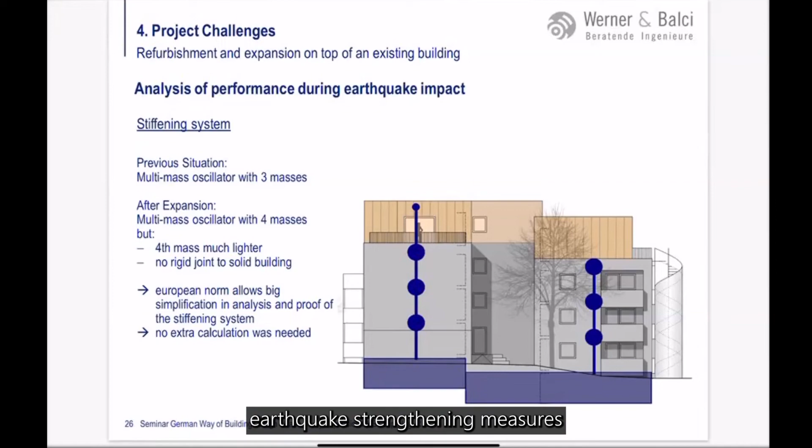Energetic, as I told, we used insulation material. Do you have some questions on the structural things? I will later talk about the building physics. Is there anything about structure?

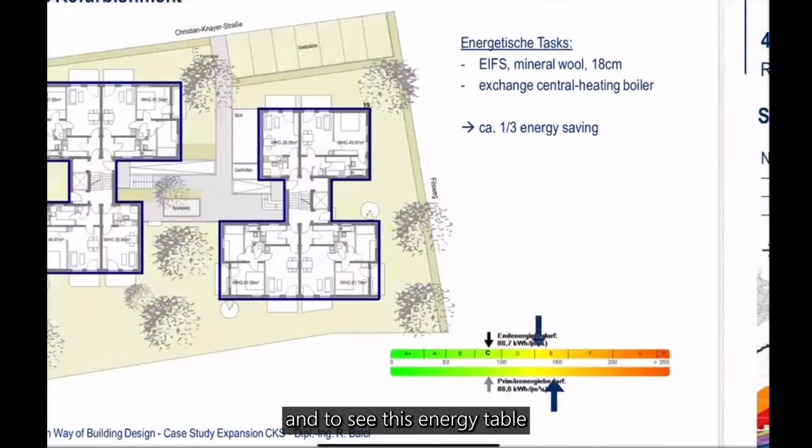You see this energy table. Before we were here, and after the refurbishment we are here - so this is optimization from orange to light green. Zero energy would be here, but this is not possible for that kind of existing building. But for new buildings we will do that - we can build with zero or minus energy.

At the end, in sum, we had a saving of 1/3 of the existing energy. That sounds not that much, I know, but you have to imagine we have light energy for lamps, we have the elevator energy - it is new energy. We added new engines in the building, so we have new consumption which we didn't have in the past. We added new apartments.

And warm water demand is always the same - for shower, for washing and so on, the warm water demand is always the same. But the heating demand is reduced very high. So in total we will have 1/3 less energy demand than before, and for an existing building this is really good. So we have an existing building refurbished, 6 new apartments added, and 1/3 less energy consumption.

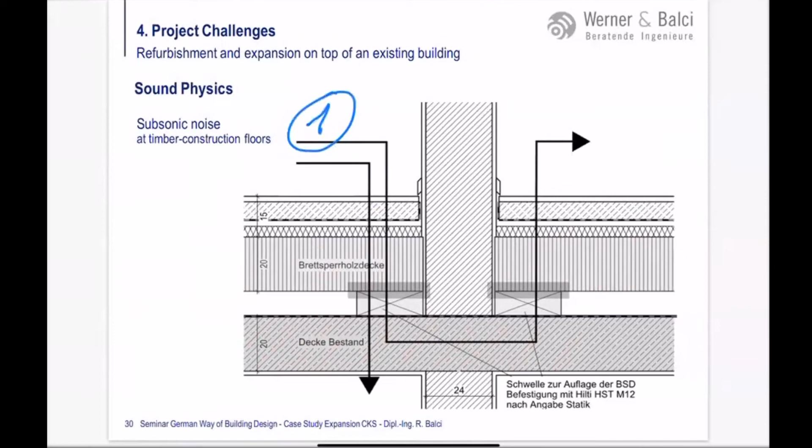This is the outer sound, the exterior sound, but we also have the interior sound. Interior means between apartments - you see the existing concrete slab, and the new timber slab. Here's apartment number 1, let me do it - we have apartment number 1, apartment number 2, 3, and 4, and they are divided by a concrete slab here, and a wall here, and a wall here.

But we have the sound propagation ways - we have the direct way, and we have the way down to this apartment, and also the way to this apartment, from apartment 1 to 3. The solution here was to use elastic separation, a sound insulation material, and special bearing elements to protect apartments 3 and 4, because these apartments had only a roof - they had no neighbors above. Later on they will have neighbors, and they don't want to hear the new neighbors. We should avoid sound propagation from apartments 1 and 2, and therefore we built it that way.

We also have a screed with structure-borne sound insulation, also here.

This is a system we checked also on site. We made sound measures, and it is really good. We had a very high, luxury apartment standard sound insulation level after this.

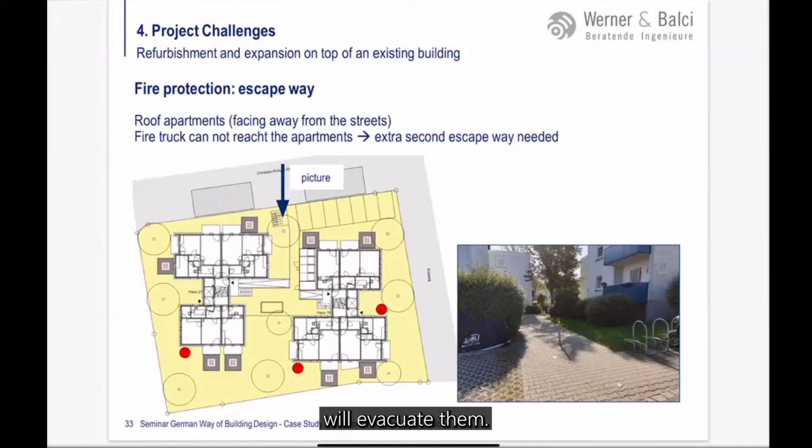Another thing is the entire MEP system was 60 years old, so we needed to change every pipe, every wire, electrical installation, also in the existing apartments. This was a big issue because there were people living in these apartments, so it was done step by step, room by room. It was a hard construction stage because it was done also in the existing apartments.

You see tons of installation and details. It's very complex, but at the end the people accepted this because they got new installation, a new electric installation. So the people of the existing apartments, they accepted this work.

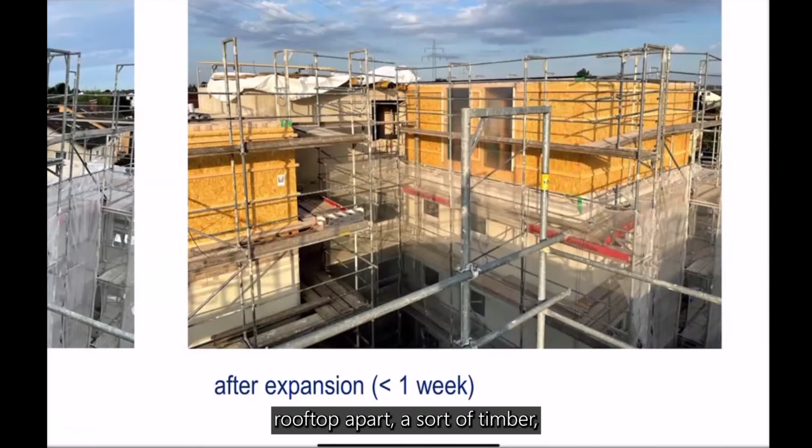Some pictures: you see here the existing building, the concrete extension of the staircase, and the concrete slab. Here's the timber slab which we put on the existing concrete slab. After a few days, you see the concrete rooftop, timber rooftop apartment. It was less than 1 week.

As I said, all the drainage installation, MEP, also the system under the soil needed to be done completely new. So everything was done new, because after 60 years some things were broken. So we decided to do all the things new.

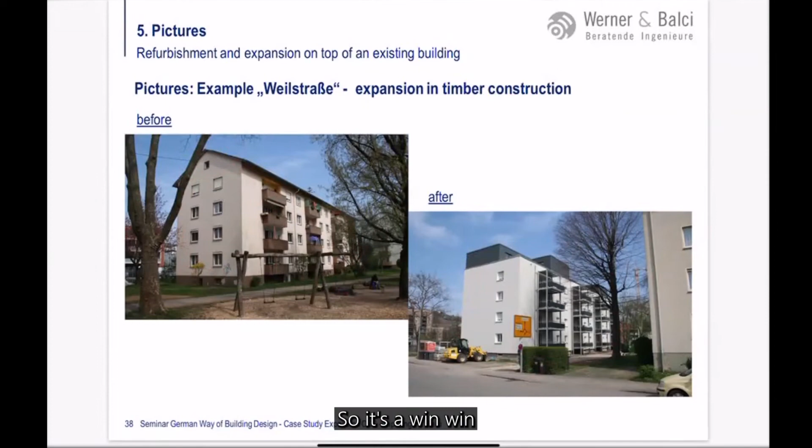For example, the Weilstraße - this was the situation before, this is the situation after. We cut the roof, added rooftop apartments. We cut the balconies and made extensions, bigger balconies. Now after this refurbishment, it's energy efficient, fireproofed, fair price with bigger balconies and additional apartments. So it's a win-win situation for the owner, also for the tenants.

Here you can see the rooftop apartment made in timber, and you see we have done a lot of projects - 1, 2, 3 buildings where we did that kind of system.

Another sample is am Schönen Rhein, also a project where we use this timber structure. It's a 3-story timber structure, a so-called timber concrete hybrid structure. So it's not 100% timber, not 100% concrete. It's a combination, let me say, a composite structure. So I'm done. Do you have some question?

There is some question in the chat box. Okay, open the chat. One moment. Where's the chat?

The question says that when it comes to the renovation of the cladding, you mentioned that more insulation was added to the building. How did you deal with the existing moisture problems in the exterior wall? Assuming that a certain apartment has a moisture problem, there must be similar moisture problems in other parts of the building also.